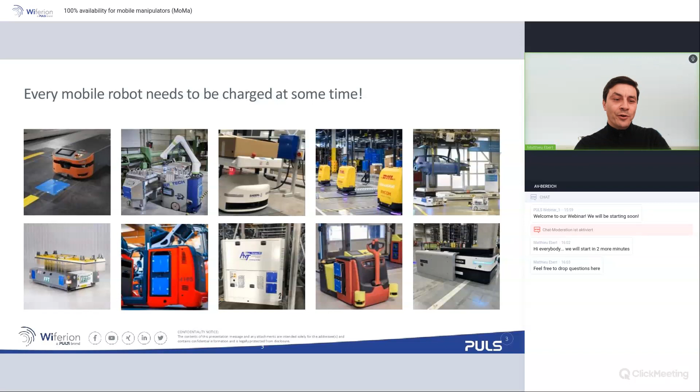I always like to frame the topic of energy supply for mobile robots very simply. There's a very simple rule why Wiferion is on the market and why we need chargers and wireless chargers and batteries. Every mobile robot needs to be charged at some time, and often we forget that. Often we forget about how to manage and design a proper energy supply, which works beyond the design phase, beyond the lab phase, beyond the zero series, which works for large-scale deployment. Keep it in mind, this is what we want to achieve.

Maybe a little flashback on what Wiferion serves as an industry. We are mainly focused on industrial applications, so warehousing, e-commerce, manufacturing. But specifically for the webinar today, we have some upcoming industries, and by upcoming I mean upcoming automation deployment. We have medical applications, food and beverage applications, semiconductor and pharma - this is something we will emphasize on today - plus paper and wood and oil and gas industries.

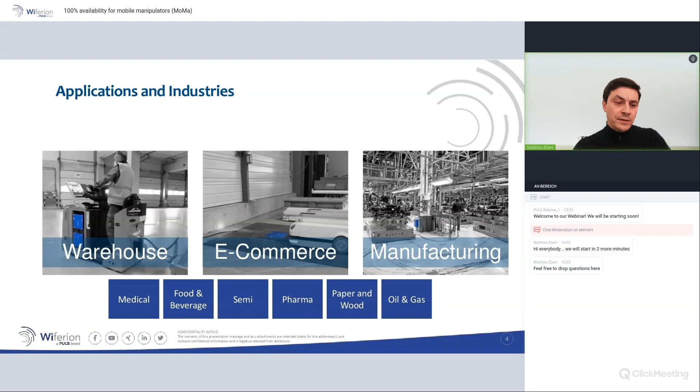All of those industries have very specific requirements to safety, and safety is also a very specific requirement to charging. So keep it in mind when we talk about benefits of the solution we are offering today, how this is being leveraged in semi, pharma and medical industry.

Our target audience, our target customers are AGV, AMR, mobile robot OEMs. So we are offering components. We do some consulting and some, let's say, conceptual consulting for end users. But in the end, we are dealing with industrial trucks and mobile robots because we're a component company.

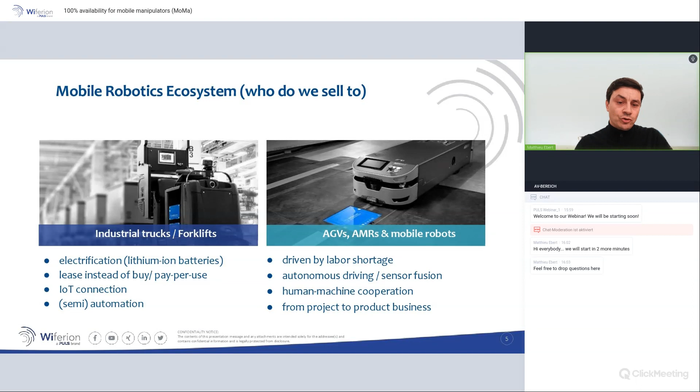One thing which is driving the commercialization of wireless charging is the vision of seamless power supply in the process. So the sketch you see here is not a MoMa, it's an automated pallet lifter, but the principle is the same: charging is part of the infrastructure, charging is not a dedicated process anymore. This is something we will have a look at today, because in the use of MoMas, in-process charging, seamless charging, casual charging can be leveraged even more than with standard logistics applications.

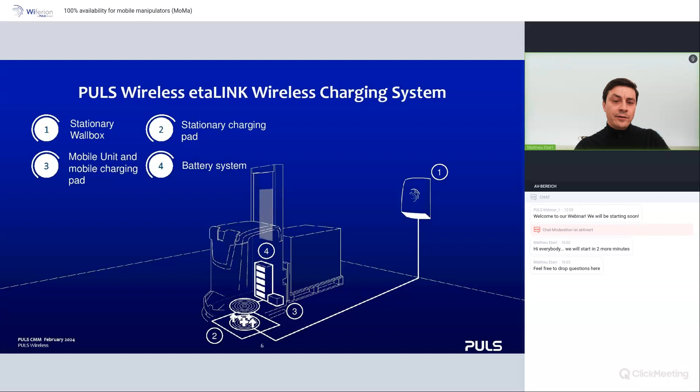So what's a MoMa? What's a mobile manipulator? It sounds a bit like a fancy buzzword, but if you look it up and browse the internet and look at the trade shows, mobile manipulators are really picking up very, very fast in attention, in deployment, in solutions being offered. Basically, a mobile manipulator is nothing else than a mobile robot, and mostly a collaborative robot, which are patched together, mounted together, and together they become a mobile manipulator.

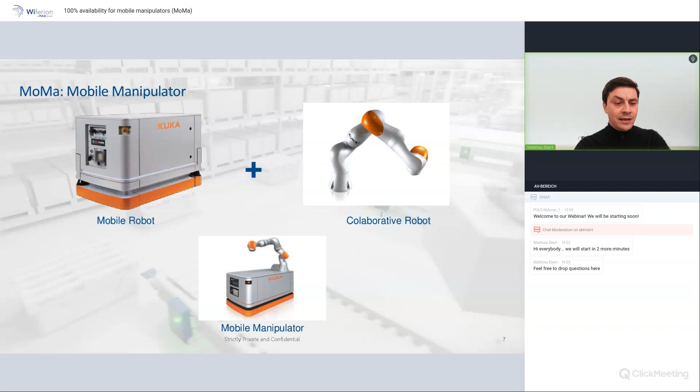So you have a robot, a 6-axis manipulator, which is not tied to a specific spot anymore. It can be moved around automatically or manually. And therefore, we talk about mobile manipulators.

And again, if we do a little research, we will find that there are plenty of different MoMa designs out there. The reason for that is that you have many mobile robots and many cobot suppliers, and you can more or less combine them however you want. The point I'm trying to make here is that building a MoMa technically or physically is not a huge challenge - it's putting together two existing systems onto each other.

But the challenge comes when you want to make a good business case out of it, because not every use case gives a good business case. When we talk about building a business case for a mobile robotics application, we typically look at three main pillars: energy supply, how smart energy supply solutions can make a solution more robust, how we can improve runtime, and how we can improve fleet efficiency. Those are the three main influence factors to make a use case a really good business case.

This brings us to our key challenge with the energy supply of mobile manipulators. We've seen before that a MoMa consists of a mobile robot and a collaborative robot on top of it. Typically, the whole installation only comes with one battery, with the battery of the mobile platform. The cobot obviously has no own battery. So this brings us to the first challenge.

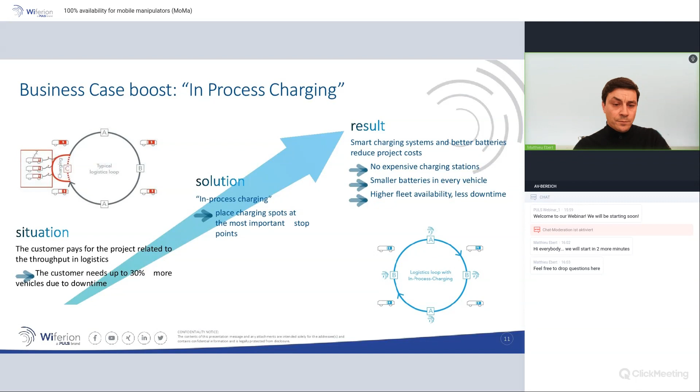So the first thing we want to improve - and this applies to mobile robots by themselves, but it's even more important if you have an expensive cobot sitting on top - we want to enable in-process charging. This means we want to make sure the robot, or the MoMa, is able to charge while it's working.

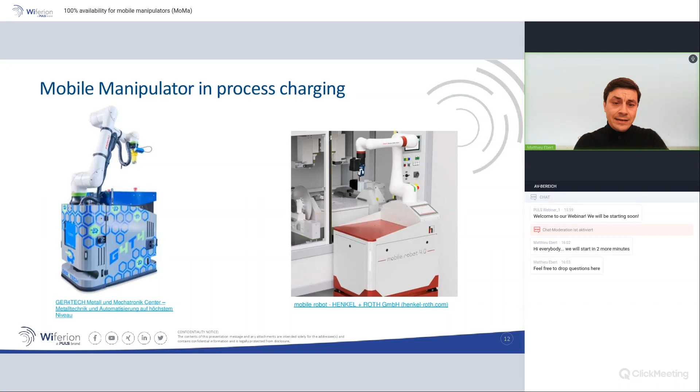This is the key to 100% uptime - to enable a setup using the right technology which allows you to have charging while the robot is doing its job. The second important factor when looking at increasing robot availability is to upgrade charging current. You want the highest possible charging current. High charging current means low downtime, short charging time.

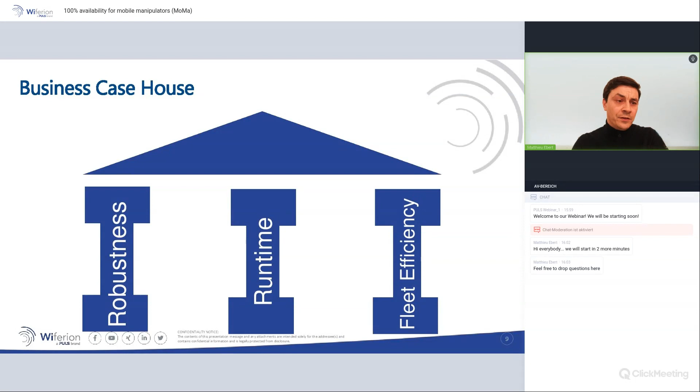Now let's have a look at the first pillar of the business case house, which we call robustness. If we look at charging contacts, which have been used for many years in the mobile robotics industry and are still used a lot, we come across downsides of this technology: wear and tear, bad contacting, arcing, tripping hazards. All in all, those downsides are accepted in low-tech applications, where we have maintenance staff around, and not very demanding applications.

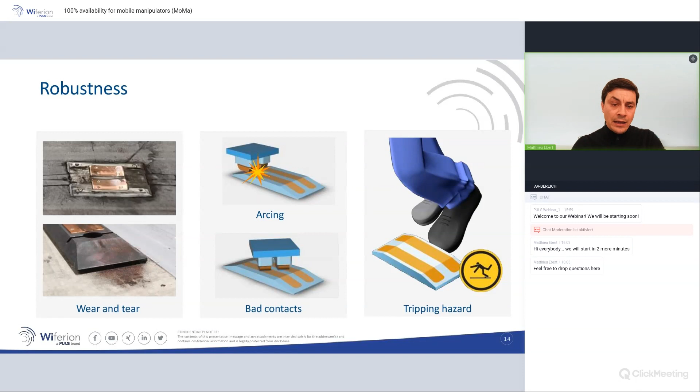If we recall the applications where we want to deploy mobile manipulators and achieve a good business case, like semiconductor, pharmaceutical, and high-end manufacturing industries, very likely we will not be able to accept those kinds of hazards which decrease our robustness. This leads us to the conclusion that charging contacts are not a very good design choice for demanding applications, and they will very likely significantly downgrade your business case.

Let's look at one very specific example: clean room applications, semiconductor applications. There is a very good article written by Mike Bacidore in March 2023, roughly a year ago, in the US magazine Control Design. Mike looked at how to power AMRs and AGVs in clean rooms. The logic behind it is exactly the same as for mobile manipulators, which is why I like to choose this example.

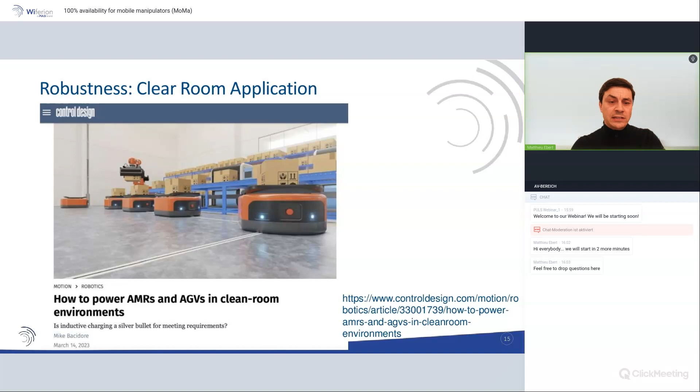I have selected a section of this article where they discuss the upsides and downsides of using robots in clean rooms. One conclusion is that very likely in a clean room you will not be able to use charging contacts, because charging contacts, by rubbing the copper or brass contacts against each other, will simply generate loose particles. And in ISO certified clean rooms, you have to stay below a certain threshold of particle emissions.

So what is your choice? What are your options to charge a robot in such an environment? Either the robot can leave the clean room for charging - technically this is feasible, you open a door, drive out, close the door again - but from a business case perspective this is the worst thing you can do. It simply decreases the availability of the robot by having it charge outside of the working environment.

The other option, suggested in this article, is to use wireless charging. Wireless charging has the huge benefit that it simply doesn't emit any particles. If we look at the etaLINK 3000 system, which we offer, our system is certified according to ISO 14644 cleanroom certifications by a Fraunhofer Institute. It has been certified for not emitting any particles.

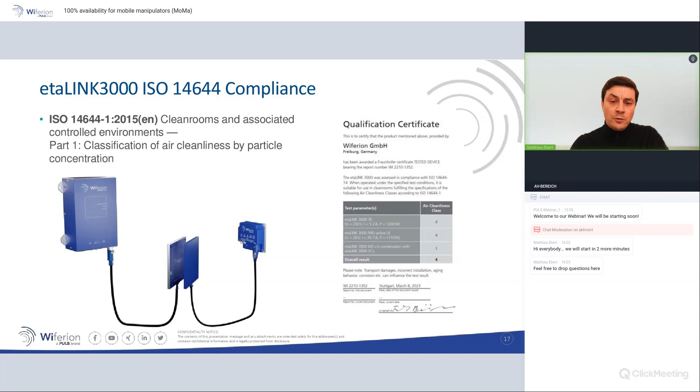So how do we realize this technically? What components are needed to do this? If we look at robots available on the market - this is a simple Google research, not a specific project we've been working on - you typically see two ways to do this.

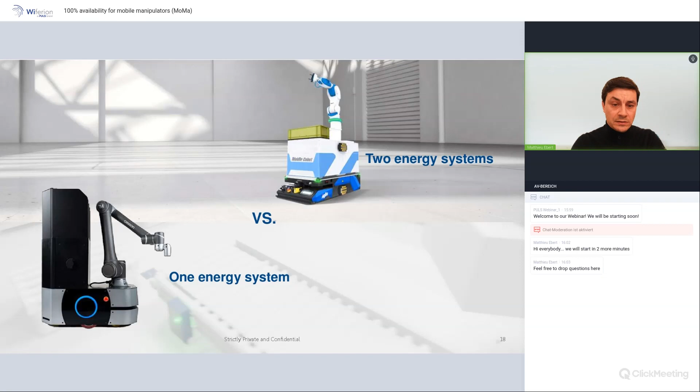To me, this is simply showing that the system design of the complete solution was not made in a holistic approach. If you look at the robot on the bottom left, it has one energy system - this is a way more integrated solution. The cobot is powered by the platform. There is a benefit to both of the solutions, but there is an even better way to do this. If we look at all of the cobot applications out there, they all have - I'm just going to show again the overview of the robots we found online.

I would say that 90% of the robots here have some big chunky box sitting between the platform and the cobot. This will very likely contain some control systems, some PLCs, some power supplies, some vision systems, or the CPUs for it, etc.

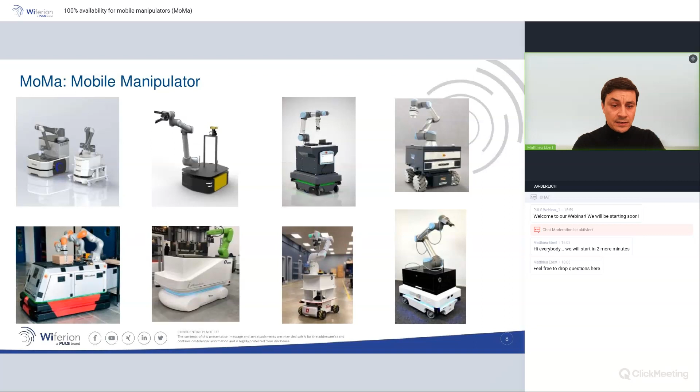If there's obviously a demand for such a box for some control systems, why shouldn't we use this box to add the additional energy components which can be used to power the complete solution?

If we just imagine having this box in the middle equipped with some additional batteries and with a central wireless charging solution, we not just add additional battery capacity to power the complete solution, but we can also embed a wireless charging solution which will allow us to opportunity charge the complete system at each process stop where the robot is stopping anyway. So let's assume this robot does a bit of pick and place here and there.

If we identify the pick and place stops or spots where it sits a little longer, like a couple of minutes, 5 minutes, 10 minutes, we would implement a charging spot there. And in this time, we would energy boost the complete system, because of course we would select batteries which are able to be fast charged. We would select a charging system which has a high charging current.

In an ideal world, this would lead to 100% uptime for the complete system, making the end user, making the end customer happy, because he would utilize the system in the best business case possible.

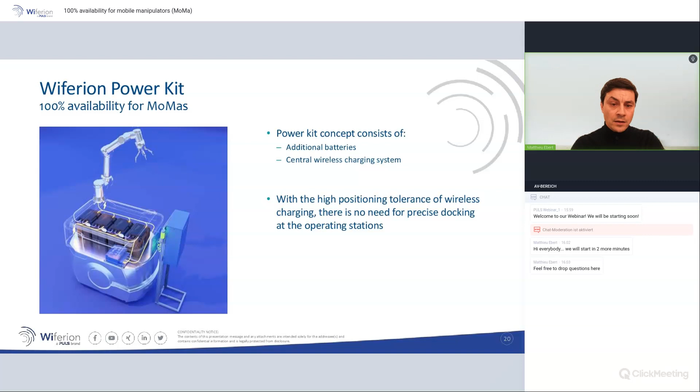So how do we do this? As Wiferion, we've always been very focused. We only offer chargers and batteries, the necessary consulting, the necessary field service, but we do not get distracted by the whole periphery. So we have a 60 amp charger, we have a 1 kilowatt charger, which is being launched just those days.

It does 42 amps at 24 volts. And we also offer suitable batteries, which are perfectly matched to those chargers. And with those components, you're able to equip your mobile manipulators in such way that you are able to achieve 100% uptime.

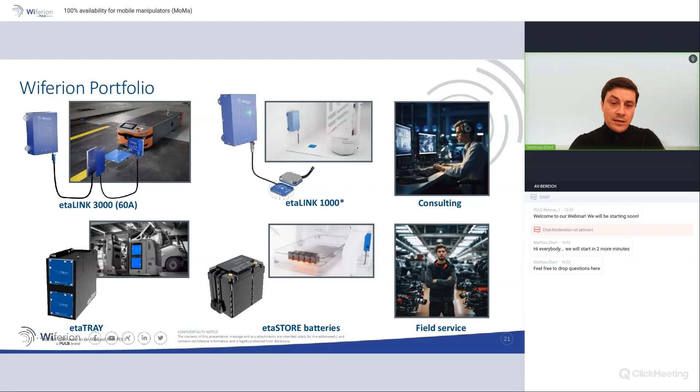What's the benefit of wireless charging, generically speaking? We have a high IP rating. So we could have the robots, for example, either operating outdoors or being thoroughly washed, like needed in medical applications.

We have one charging solution which is able to serve different voltages. So if you would have a robot with a 24 volt system or a robot with a 36 or 48 volt system, you could use the same charging stations.

Of course, the system has a very good efficiency, which is necessary nowadays to save energy costs, but also to have an acceptable CO2 footprint. We have an extremely fast charge begin, so even small stops, even very short stops can be utilized.

The systems can be omnidirectionally approached. So if you would charge from the bottom of the robot, you could approach in any orientation, you could approach from any direction. Gives you a huge freedom of routing layout. And we have a very high positioning tolerance.

And this is the key for a very simple system design. So I've learned that most of the cobots are vision driven. So they do not stop at a specific absolute position. They stop at a pretty coarse position, and then they have a vision system making a secondary positioning referencing so that they can pick and place even small components.

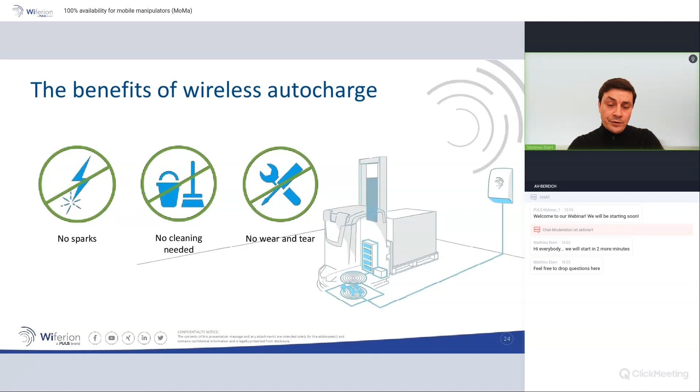Last but not least, I would like to emphasize on a specific benefit of wireless charging. It's interoperability.

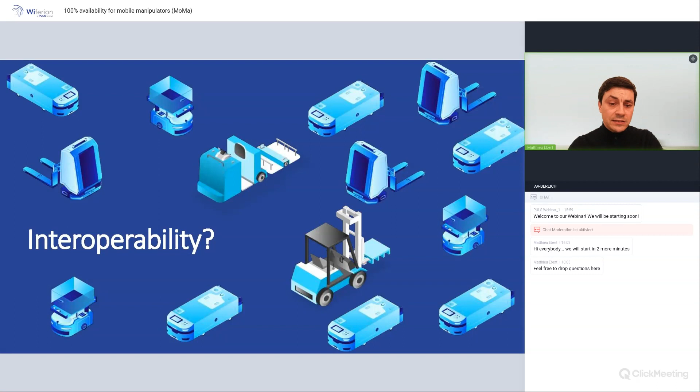Wireless charging is one of the options which allow you to use the same charging spots with different types of robots, of course, which are equipped with the same charging solution, but then they can all share the same charging stations. I have to apologize, this slide should be a GIF, an animated GIF, and it doesn't play in the webinar.